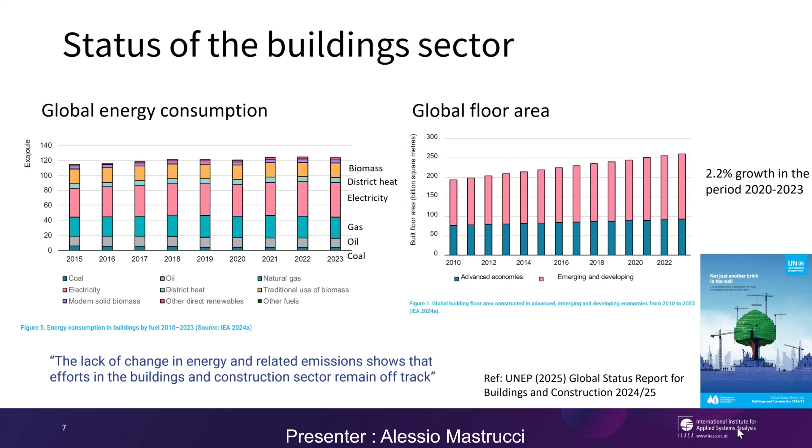And so those energy efficiency improvements have not really corresponded so far to absolute reduction in the total energy demand for the building sector. And this means also that we still remain off track compared to our mitigation ambitions for the sector.

So why is the building sector challenging? Because it's of course quite a complex sector. It's very much linked to the different contexts and climate. Very heterogeneous. We have many different types of buildings with different requirements and different options for reducing energy and material demands. And many actors that work in or use buildings, starting from the households living in the residential sector up to the constructors and other companies, and also all the way up to the policymakers that decide on the building regulations and policies. And challenges related to buildings also differ very much in different world regions.

In the global north, we have to deal with the existing building stock that is often also quite energy inefficient, and therefore the mitigation potential mostly relies on renovation of existing buildings to improve their energy performance and reduce energy and material demands. While in the global south, there is an unprecedented stock expansion expected to come in future years, and this is due to population growth in many regions of the world, but also increase in the building size as affluence is growing.

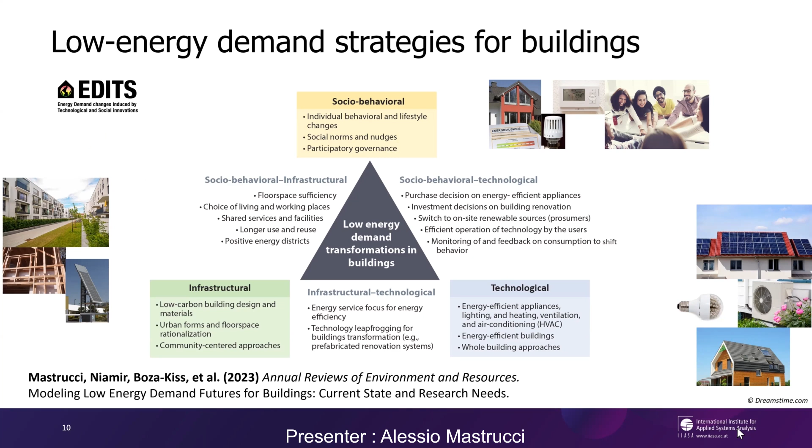And when it comes to the building sector, in our recent research work in the EDITS project, we have been trying to map what are the most promising strategies and opportunities to get to low energy and material demands. And we started by conceptualizing these strategies along this triangle. So these three different dimensions of transformation: social, behavioral, infrastructural, and technological. And I will briefly introduce them to start with. So I will start with the technological transformation. So maybe this is the dimension we are more familiar with.

So when we talk about energy efficiency improvement in buildings, there are options that are now well known and already applied in many world regions, which basically allow for reducing, in the first place, the energy demand related to buildings by, for instance, insulating the building shell or replacing windows with more efficient ones. And this enables reducing already the demand, for instance, for space heating and cooling within the buildings, while keeping comfortable temperatures and humidity inside the buildings.

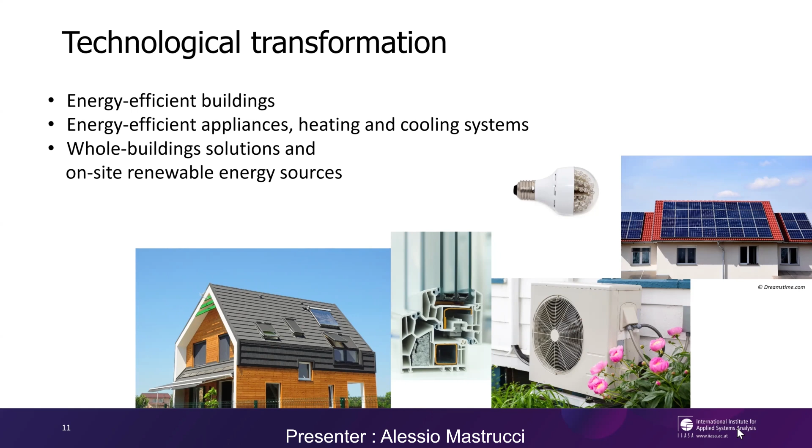The second step regards the energy efficient appliances, heating and cooling systems, and so we can improve the energy efficiency of those buildings. So you see, for instance, here the picture of a heat pump, which also allows basically for further energy reductions. And finally, we can think about the building as a whole and also integrate renewable energy sources with the buildings and complement those energy savings also with clean energy supply.

But there are also two other dimensions which are very important. So the first one regards the infrastructure. And so if we think about the way cities are built and the urban form, we can already contribute to reducing these material and energy demands by designing those urban settlements, for instance, in a more compact way, so that we can have more efficient buildings and also reduce the floor space. So we have, for instance, in Europe, a problem with vacant buildings that could be to some extent reused, so to avoid the construction of new buildings and basically optimize the occupation of existing ones.

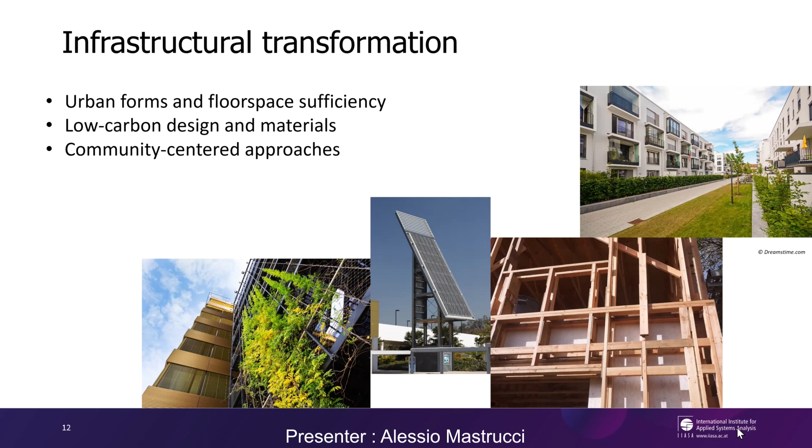And this goes also through, for instance, adaptation and flexible reuse of buildings, but also materials are very important, and switching to low carbon materials or bio-based materials could provide also an important contribution to reduce embodied emissions. And finally, also community approaches can help there.

The third dimension, also a very important one, is about the social behavioral transformation. So all of us can make a contribution to reducing the energy demand of buildings with our behavior and also lifestyle choices, and also, for instance, reducing the set point temperature for heating can contribute to reduce that energy demand. And there are also many different types of strategies and policies which can contribute to inform people and make them more aware of low carbon lifestyles, and therefore also engaging with citizens with a more participatory approach and help basically also with just behavioral measures to reduce those energy demands.

I wanted also to highlight that there are some important mega trends which also are cross-cutting across these dimensions. And the first one is, of course, digitalization. And so digitalization can directly and indirectly influence material and energy demand in the building sector. And since there is also a risk of increased energy demand because of digitalization, this is very important to take care of, but there are also some opportunities, for example, in using smart meters and building information modeling to optimize some processes, operation in buildings, but also design of buildings, and contribute to reducing energy and material demands.

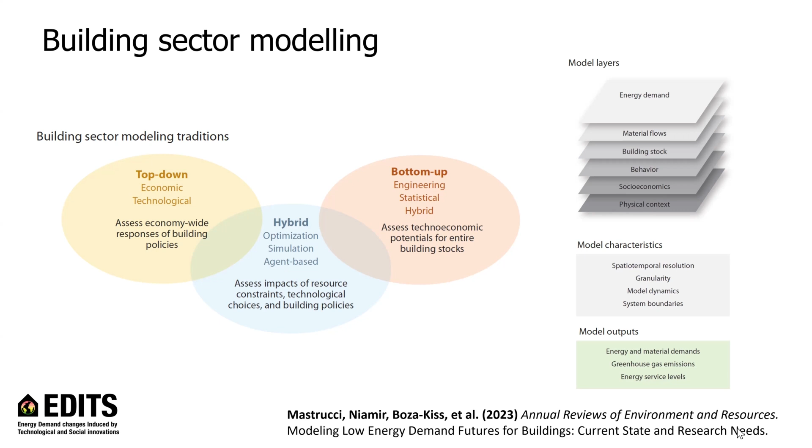So current modeling has been focusing prominently also on the technology side, but there are also different layers which are very important here. As I will show in the next slide, we have been surveying different models from the EDITS network focusing on the building sector, which has highlighted indeed that while there is a strong focus on technology and technological innovation in many of them, there are still some gaps, especially on the representation of socioeconomic aspects and dynamics, as well as urban form and other aspects related to infrastructures that would need to be bridged in order to improve the capacity of these models to provide support to different types of policy.

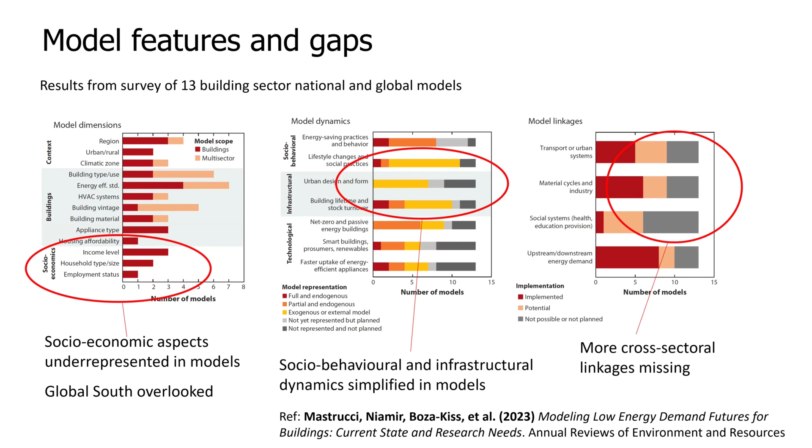And also the global south has been underrepresented or represented in a more simplified way in this set of models. So here is also a suggestion to focus more on the different world regions to really support the mitigation strategies in different world areas, as well as sustainable development, and look also into cross-sectoral linkages.

This is MESSAGEix-Buildings, our building sector model we have been developing at IIASA, and this includes models to assess energy demand and material demands in the building stock, and also for household appliances. And we tried here, while focusing on the global scale, to also keep a high level of resolution and detail to account for the differences in the building sector across different socioeconomic groups, building characteristics, and different world regions.

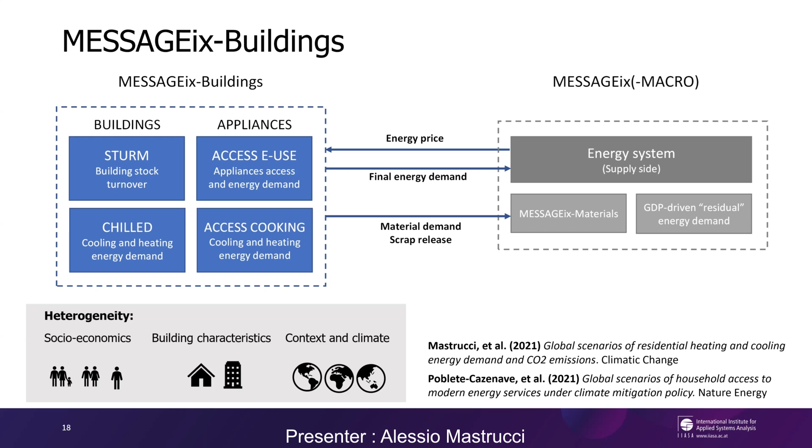And we have established a connection also with the supply side model, MESSAGEix, which is indeed focusing on the energy supply system, to capture the key interlinkages between the demand side and the supply side. At the core of this model, we have two key components. So the first one is a model called CHILLED, which is used to estimate energy demand for space heating and cooling globally, also with quite high spatial resolutions.

And then we have a second component, which is called STURM, which accounts for the future stock turnover, so how the building stock will evolve into the future in different scenarios. And here we also have embedded a set of discrete choice models. So these are logit type models, which represent the decision of households in energy efficiency investment. So this is a simulation-based approach.

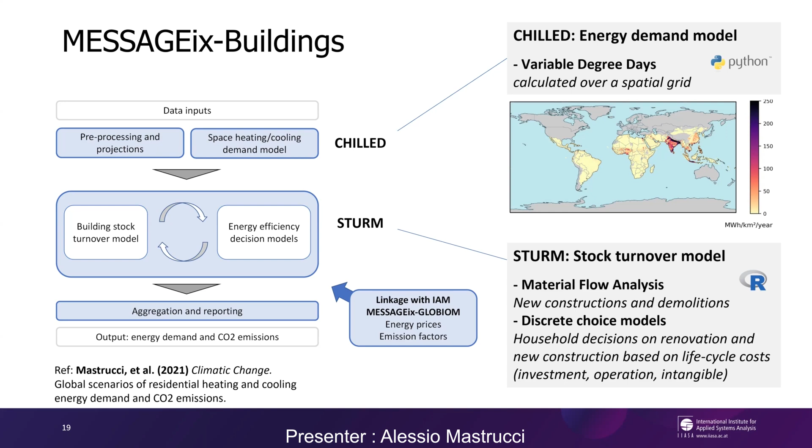And as you can see, we also take some inputs from MESSAGE when it comes to energy price and emission factors to account for them in the different types of future scenarios. So at the core of the model, there is a description of the building stock into a set of different building groups and cohorts. And we account here for different building types and different periods of construction, as well as renovated and newly built, and try to represent also different energy carriers and different materials. So each of these different categories is represented by archetype buildings.

And we can therefore upscale also results from the single building cohorts to the entire stock by accounting for how many buildings of specific types or specific cohorts are present in the stock in different time steps over the future. As you can imagine, for the global implementation, we used an extensive set of data to inform the model, and we try to rely on different census data, statistical data, and building libraries from different world regions.

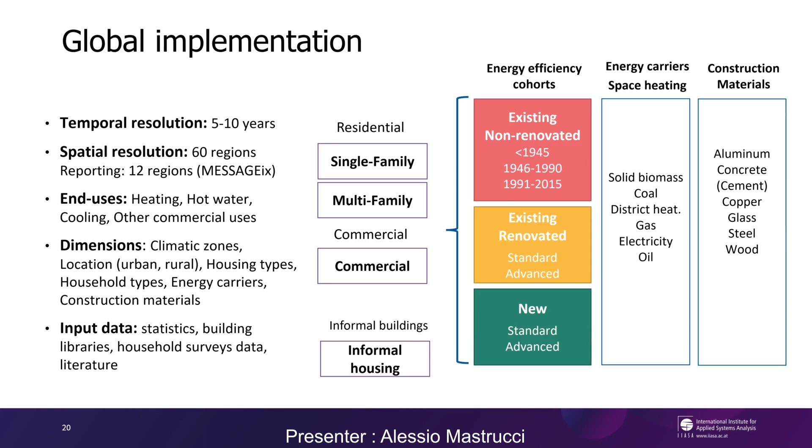And we typically use this model to develop scenarios up to 2050 or also to the end of the century, accounting for the evolution of the building stock and then projecting energy and material demands. So let's now move to some more concrete examples of scenarios that we have been developing. And I will show first some scenarios at the global level and then also some national and regional scenarios.

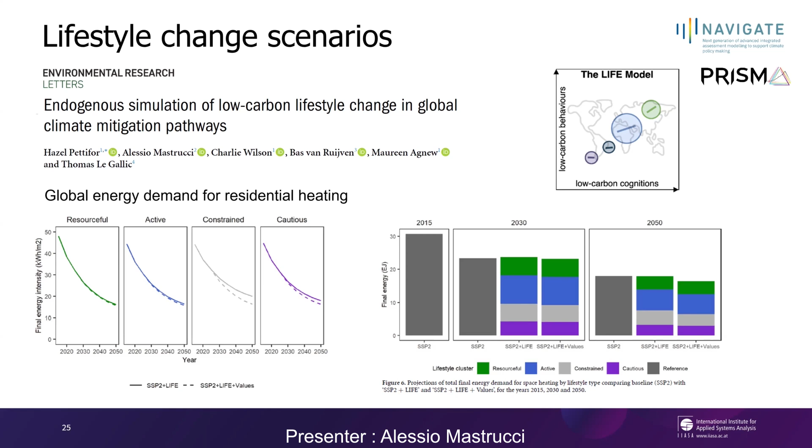And so we developed a set of scenarios where we try to understand the potential for shifting those lifestyle changes with strengthening the cognitions and also shifting the values of these household groups. And we could highlight here that there is a potential for the constrained and cautious groups to further reduce energy demand in their homes by changing the set point temperatures, but also uptaking more advanced renovation options to reduce the heating demand. And globally, this could result in a reduction in energy demand in the order of magnitude of 8-9%, which of course is not negligible if we want especially to look into more ambitious climate goals.

And finally, just a couple more examples, more at the regional or national level. So this is a study which was led by Luca Vivier and tried to understand the potential for different policy options in the European Union, encompassing also carbon taxes, heat pumps, and energy renovation. One interesting dimension here beyond the CO2 emission reduction was also the cost dimension.

And we made an assessment of the cost benefits associated with these different strategies, highlighting that, for instance, renovation is quite costly. And so there is quite some investment cost associated with that, whereas the cost benefit ratio is more favorable for heat pumps.

But at the same time, renovation can be also associated with alleviation of energy poverty. And so targeting energy renovation for older buildings and especially for energy poor households can also have quite a significant impact on alleviating this issue of energy poverty and can be an effective strategy in such a context.

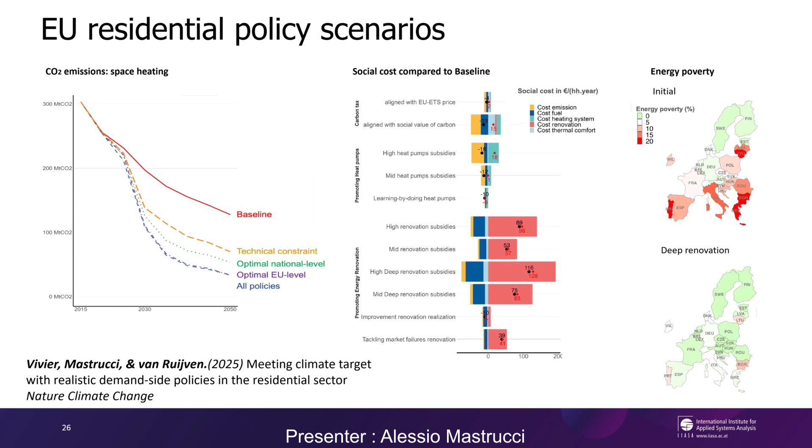The last example I wanted to show is from a project called Circular. So this is a Horizon Europe project where we investigate the potential of circular economy strategies in contributing to mitigation, in this case in the building sector. And we focus here not just on energy demand, but also especially on the material demand.

And this is a study we carried out for China, which of course is one of the countries which is contributing the most to embodied emissions for building construction due to quite intense construction activities. And we show here how some demand side options to reduce material demands, including reduction of floor space, for instance,

switching to different building types and co-housing and co-working, but also switching to more low carbon materials and wood-based construction and extending the lifetime of buildings, which is quite short in China, could contribute to reduce the material demand by more than 60% by 2060 compared to a reference scenario.

And this has quite important implications also in reducing the embodied emission part of buildings, which would be very important, especially in the framework of more ambitious mitigation policies. And we show that in the case of China, around 60% of the embodied emissions by 2060 could be reduced compared to a reference scenario by implementing these strategies. And this corresponds also to 24% under current policies of the total life cycle emissions for the building sector.

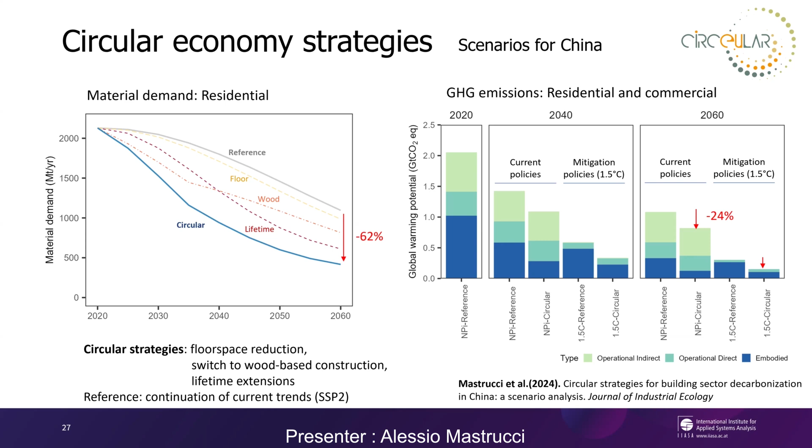And so also thinking about the massive expansion of the building sector, which is expected in many countries in the global south, this is a call also for the importance of looking into materials and not just energy to really achieve the climate mitigation goals. And with this, I would like to conclude my presentation.

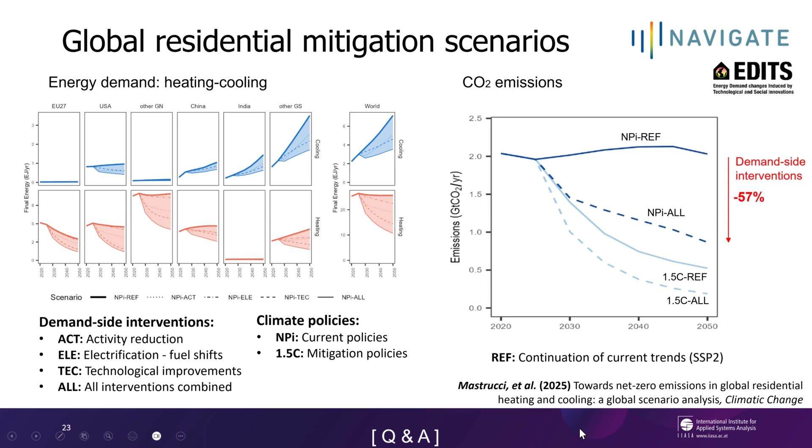There's one question in the chat, so let me read it aloud. Thank you very much for your insightful presentation. When considering the embodied CO2 emission from material flows, I thought that the country where products were manufactured would have a significant impact. And so Alessio, how do you consider such international material flows?

This is a very important question. Indeed, this is something we are currently working on. I think when it comes to the building sector specifically, we need to make some distinction, because many of the bulk materials, if you think about cement, for instance, are usually locally produced or produced in a quite close location. But of course, it's not the same if we think about other materials, which could include steel, other metals, and plastic. And indeed, I think it's very important to account for the site of production of those materials.

And we are working on implementing this part in our framework, to better account for the trading and where those materials are currently produced, and therefore where emissions for producing those materials are happening, so that we don't just shift our emissions to different regions, and suddenly we have decarbonization in our focus regions, but some burdens somewhere else. So thanks very much for that question, very important.